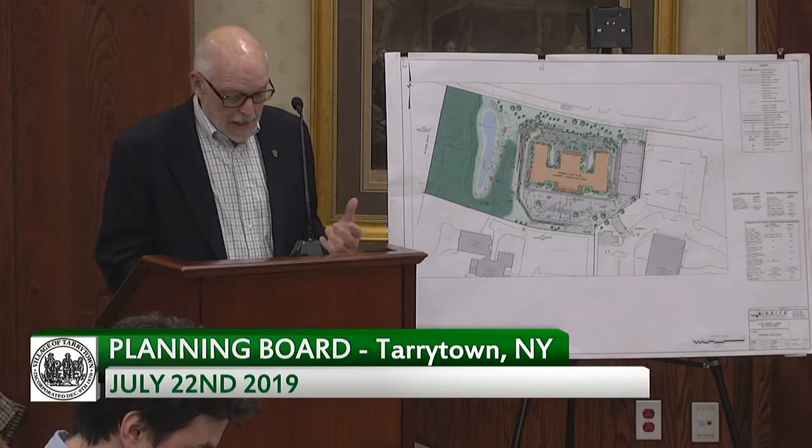Relative to environmental impact, we believe that through compliance with current building, energy, and stormwater regulations, we would have no adverse impact. Relative to zoning, we are asking that you make a positive recommendation back to the trustees because we believe our text appropriately protects the village, particularly providing a buffer between commercial kinds of uses and residential uses, making no significant impact on village services.

And providing the planning board in the text maximum flexibility in site plan review to make sure that there is no impact and that there is, in fact, maximum practicable effort made to include sustainability measures. Therefore, we are very much hoping, after you hear comments tonight, that you would close the hearing and move forward with this, including a recommendation to the trustees.

We, after all, need at some point to move forward in order to know if the village will allow this use at all, because it is not currently a permitted use in the village. So we're hoping this moves forward. Thank you very much.

Does anyone else in the audience wish to speak on this application? Okay, Bob, you want to come up? Tell us your name and your address, please.

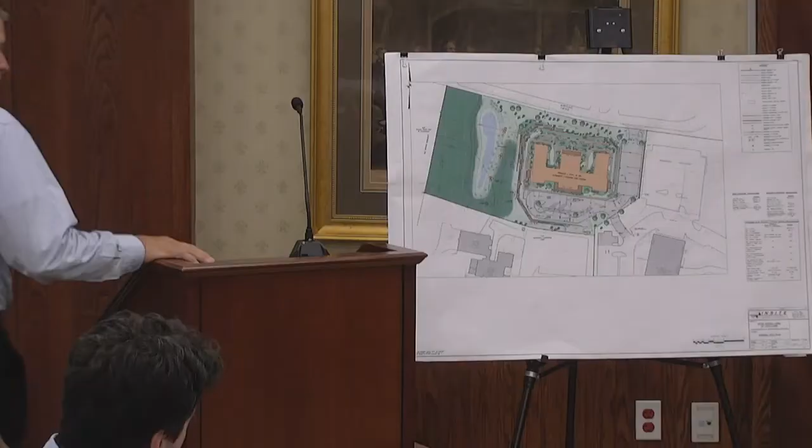Yeah, my name is Alan Green. I live at 8 Bridge Street here in Tarrytown. I grew up in Westchester, born and bred here. Raised my 3 kids in Edgemont. Love Westchester. I've been a commercial lending officer for my whole career, over 40 years. Made commercial loans in this area to probably 100 companies.

Saw it develop. Westchester I'm very proud of, and to see what has happened to it, from a dirt road I used to see on Central Avenue to great thriving businesses. I'm familiar with Transfiguration. I have friends who sent their kids to school there and I'm familiar with the area, and I feel that the site would be a good site.

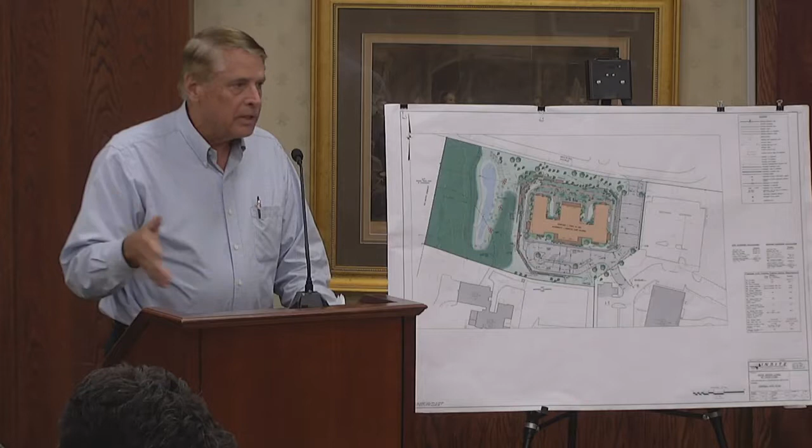I have no ties to anybody here except that I do know the sellers on a familiar basis, and I know they contribute to the community. I was on the board of directors and currently am on the executive board of directors for 20 years with the Boy Scouts, the Westchester Putnam Council here in Westchester. We've done a lot of good things. We have 8,000 scouts that we take care of and help.

And I feel that I have some personal experience with dementia and Alzheimer's. My father had it, and my first cousin had it, and there was no place to take them that really suited them, so I had to send them out of state, which was rough for me.

I feel that I've read something about Artis. They've done very good jobs. I worked in New Jersey. Part of my job was in New York, covering healthcare, and Alzheimer's specialties and dementia specialties are really a needed thing in this country, and we have to be more conscious of the spread of it because there's an awful lot of patients, people in need.

I was in the Navy for 3 years, served as an officer on a destroyer, and my honest opinion is that this site is a good site for it, and Tarrytown would be proud of it. Thank you. Thank you.

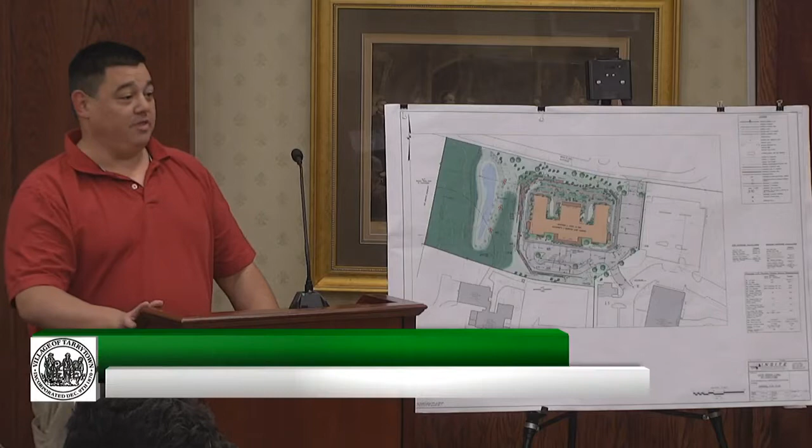Good evening. My name's Kai Yamamoto, longtime watcher of the planning board, first-time speaker, I believe. My wife, Kimberly, and I live at 20 Browning Lane with our 2 young sons. I've been a Tarrytowner for my entire life, which is, I think, a long time. And I thank you for the opportunity to speak this evening.

I was inspired to speak here this evening because I was watching the planning board meeting and I saw Ms. Raziulis mention that maybe people in the community might want to come speak, so I took that as an open invitation.

This also led me to read into and look at the SDEIS papers submitted. Over the past month, my wife and I, who are both registered nurses, have been walking around Tarrytown on daily morning walks, and we happened to walk past the site where this is planned. That inspired some conversation because I mentioned, oh, this is what they're going to do, since we saw the sign out that said the planning board is meeting about this.

We're happy and encourage a great amount of open space, and we like what the planning board has done with open space in Tarrytown. But we're also realists. We believe that development does have to happen, and it will happen here in Tarrytown.

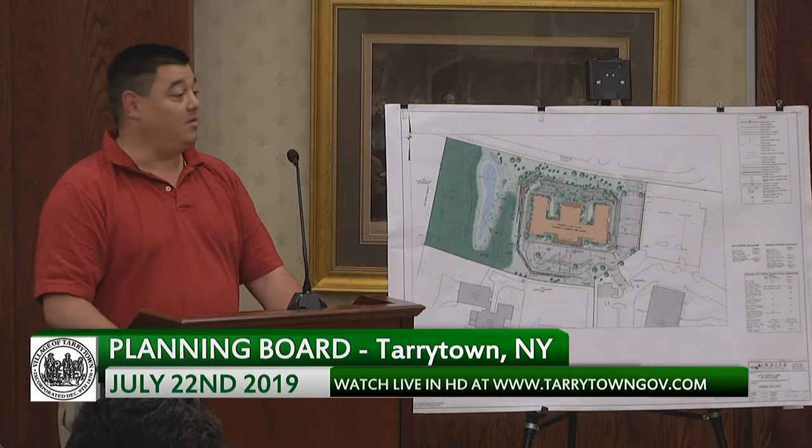Oh, really? I think you all know who I am. I'm the owner of the property right now.

We've owned this property close to 15 years, and we've worked closely with the town. Dan and I have had many meetings. We've spoken and tried to work with the Board of Trustees and with the village attorney.

We were fortunate enough to, originally we were going to build a 60,000-foot building on this property, which was the original plan, a 3-story office building. At that time, we had a medical group that were going to take a third of the building.

And then we were fortunate enough to meet Artis, and they came with a plan that I thought was more acceptable to the town because, A, the size of the building was 36,000 feet, smaller. I think one of the problems that Mr. Tedesco had said to me back then was he was concerned about the height. When he drove down Martling Avenue, you'd see a high building. Now this is a 2-story building instead of a 3-story building.

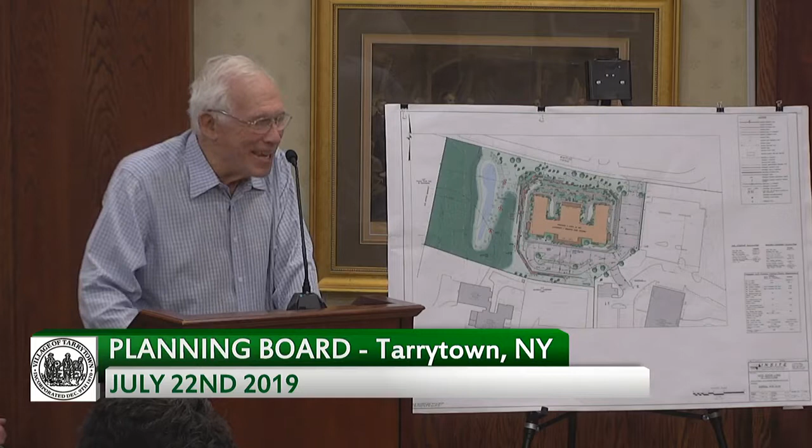So I know you've been working hard to get this thing passed. I appreciate all your work and that time and effort. And I just came here to thank you for your time and effort, and hopefully we can get this thing finished up before the end of the year. Thank you. Thank you.

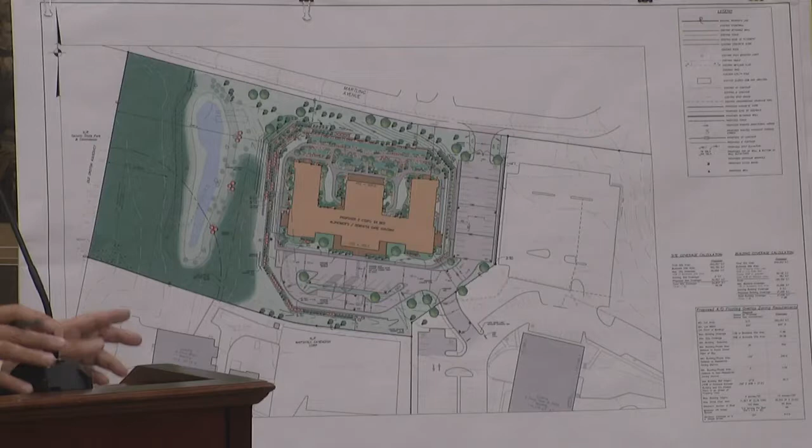The area to the left, going toward the aqueduct, where's the property line? Is that actually a live water body filled with water continuously? No, it is not. This is the detention pond that was built in 2015. There is no continuous water body, meaning no flowing brook that goes down through this property.

All of the catchment areas on this property are delineated in the stormwater management report. When this was built in 2015, it was sized to take not only the runoff from this impervious parking lot, but also to fully incorporate the runoff from this area.

To answer your question about the property line: the property line of this parcel, which is 4.6 acres, is this dark black line I'm tracing with my fingers, about 600 feet of frontage on Martling Avenue, 430 feet down in this direction. It's contiguous with the Marshall Cavendish Publishing property along this line, and adjoins the remaining 8 acres, a different parcel owned by Mr. Silverman, that incorporates this impervious parking lot.

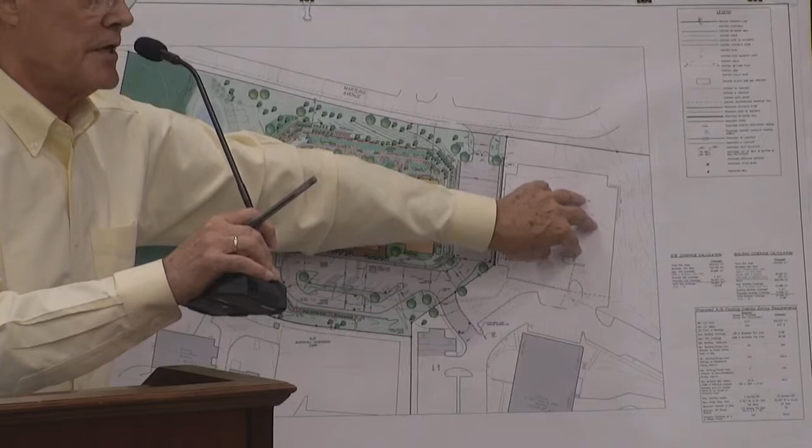So my question is, are you going to use the green space to the south, to the west of the building, for parkland or for gardens? I'm not. It will be open space forever. The short answer is, in terms of recreation for the residents, no.

That will be restricted. The residents are under what's called routine protective oversight, meaning they cannot be permitted to wander off on a garden path. I have familiarity with my own family with that issue.

So the gardens are extraordinarily well designed and landscaped. They're an actual model for the industry, because when people are looking for a place to take mom or dad, they're looking for a place they want them to be happy. This landscaping I'm pointing out here will be extraordinarily well done.

Thanks to Kathleen Snyder, who's here, raise your hand please. This area here is the area for the residents. It can only be reached through the building itself, and it's a beautifully landscaped area for all residents to walk these paths, often hand in hand with a caregiver, one-on-one.

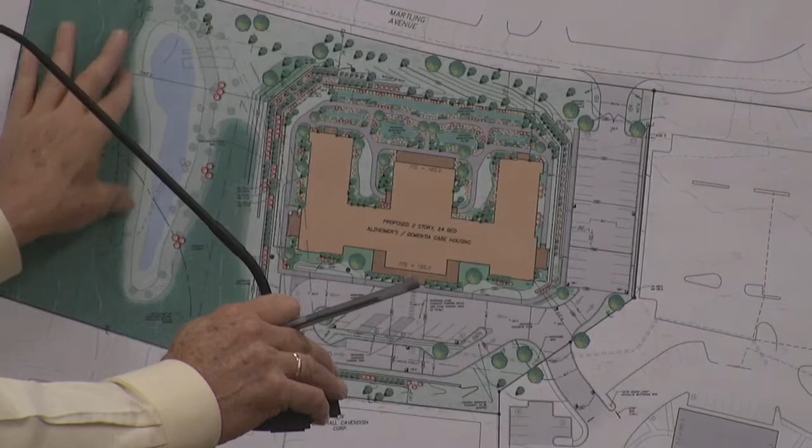These areas here, the retaining walls, would be extraordinarily well landscaped, but this area, Dr. Friedlander, is quite steep. This will not be used for recreation. This will be permanent open space forever, attractively landscaped, but its primary function is for that detention pond.

Okay, I look forward to discussing the size of those gardens and whether it's adequate in the site plan review, but you can tell me then, not now. Any questions I can answer? Any other questions for the board?

Okay, let's continue this. I'm going to move that we close the public hearing tonight on the draft SEIS, and ask the applicant to prepare the final SEIS, which will address all substantive comments made during the public hearings and written comments made during the 10-day comment period following this meeting. The final SEIS should also address all comments made by staff and council during production of the draft SEIS, and should incorporate the draft SEIS by reference.

Is there a second? Second. All those in favor? Aye. Carries unanimously.

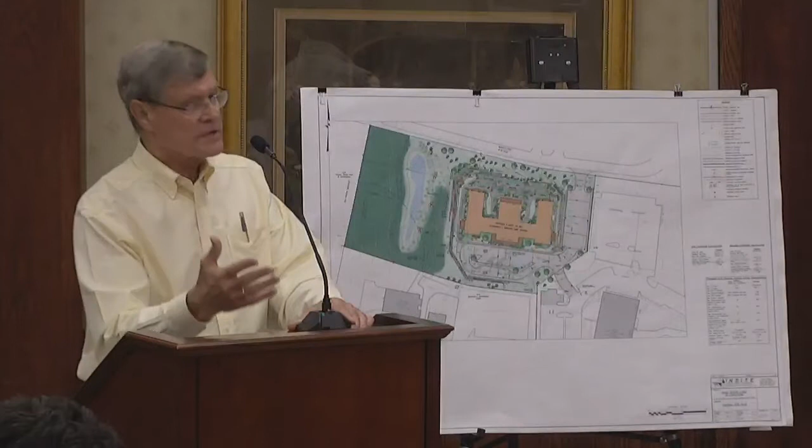Point of clarity: the public, even if they weren't here tonight, can still submit written comments to Liz Meszaros. That applies not just to people watching, but anybody in the audience who, on their ride home, says, oh my God, that's the question I should have asked. You've got 10 days, so send us the comments. Thank you very much.

Okay, we're moving to new public hearings. The first one is Michael and Angela Coffey.

I'll read the public hearing notice. Please take notice that the Planning Board of the Village of Tarrytown will hold a public hearing on Monday, July 22nd, 2019, at 7 p.m. at the Municipal Building, 1 Depot Plaza, Tarrytown, New York, to hear and consider an application by Michael and Angela Coffey, 100 MacArthur Lane, Tarrytown, New York, for site plan approval for additions and alterations to a single-family home. The property is located at 100 MacArthur Lane, Tarrytown, New York, shown on the tax maps as sheet 1.70, block 29, lot 16, in the R 7.5 zone.

The documents are available for inspection in the Planning and Zoning Office. All interested parties are invited to attend and be heard. Access to the meeting room is available to the elderly and the handicapped. Signing is available for the hearing impaired; a request must be made to the village clerk at least one week in advance. Additional approval is required by the Architectural Review Board. By order of the Planning Board, Elizabeth Meszaros, Secretary to the Planning Board, dated July 12, 2019.

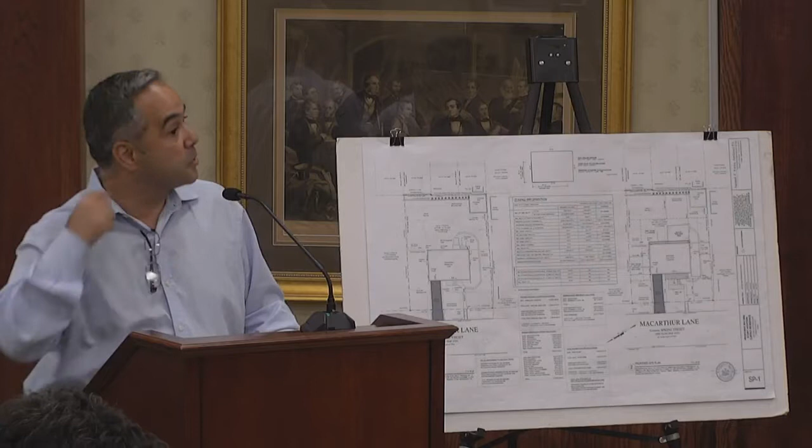This differs from my letter, from the time I wrote it to when the original denial letter was issued. There was a design with a more traditional roof that encroached upon the light plane. After review and discussing this with the applicants, they asked me to modify the roof plane slightly so that we were out of that light plane. Therefore, we will not need to go to the zoning board for any variances on this project, but we will continue to need ARB approval as previously stated.

Anyone wish to comment from the audience on this application? Anyone on the board? Anyone on the staff? Okay.

I'm going to first move that we declare this a Type 2 action. Is there a second? Second. All those in favor? Aye. Paul, you're up — we move to close the public hearing. Is there a second? Second. All those in favor? Aye.

This is on the application of Michael and Angela Coffey. Only a portion of the resolution will be read, but a copy of the general and specific site plan conditions will be provided to the applicant, and the entire site plan approval resolution will be recorded in the minutes of this meeting. Application of Michael and Angela Coffey, property at 100 MacArthur Lane, sheet 1.70, block 29, lot 16, zoned R 7.5. Resolution of the site plan approval.

Background: 1, the applicant requested site plan approval for construction of additions on a single-family residence located at 100 MacArthur Lane in the R 7.5 zoning district. These additions included a second-story addition plus a covered front porch and open rear deck. 2, the Planning Board on July 22nd, 2019 determined this to be a Type 2 action under New York State DEC 617.5(c)(11), construction or expansion of a single-family, two-family, or three-family residence on an approved lot, and therefore no further SEQR review is necessary.

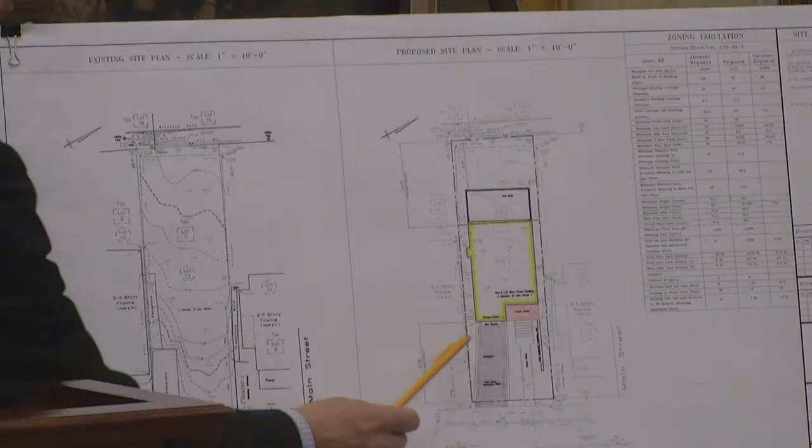I have the site plan here, which I've outlined. The yellow is the new single-family home we are proposing. The blue at the rear signifies the new deck. The front porch is in red, and I've got a new driveway hatched here. The garage would be underneath, with a parking spot in the driveway.

We feel that the single-family home we're proposing is going to be in keeping with the existing character of the neighborhood. It is a tight neighborhood with tight lots, and this lot is small and very undersized. Anything built here is going to require several variances, so we will have to go to the zoning board and the architectural board. We feel this house is not going to cause any adverse effect on the natural environment of the neighborhood.

We are providing parking for 2 cars, 1 in the garage and 1 in the driveway. There was once a house on this lot, which has been demolished. The existing survey here shows the vacant lot as it is today.

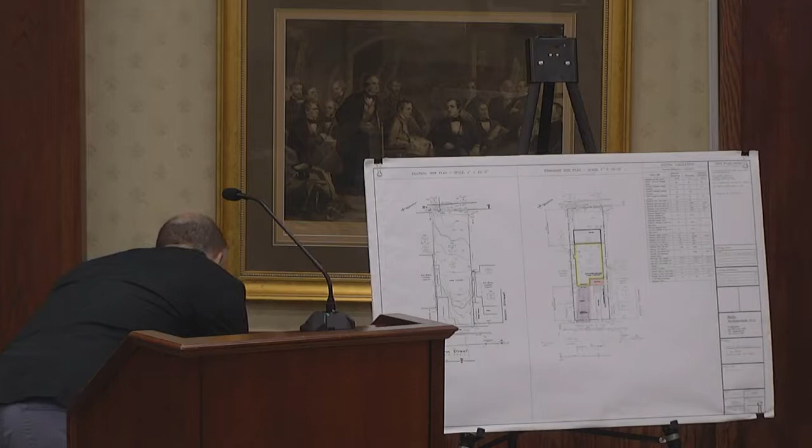By the way, the actual zoning requirement for the lot is 20,000 square feet. How much? 20,000. It's close, eh?

So this is the streetscape here. This is the house that we're proposing, the house to the left, and the house to the right. And I have photographs as well.

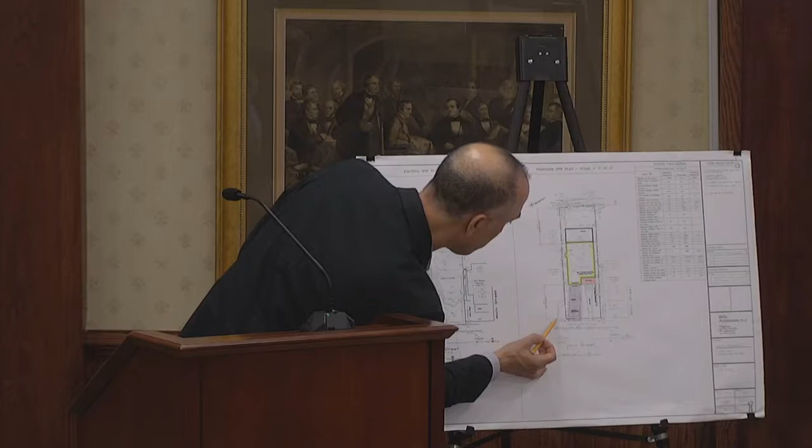And what's the setback on each house on the left and right, and the rest of the street? And what's the setback on this proposed house? The setback for our house is 30 feet, so we're trying to maintain the front yard setback. If you look at the site plan, the house to the right is about 15 feet off the property line, and this one might be around 10 feet.

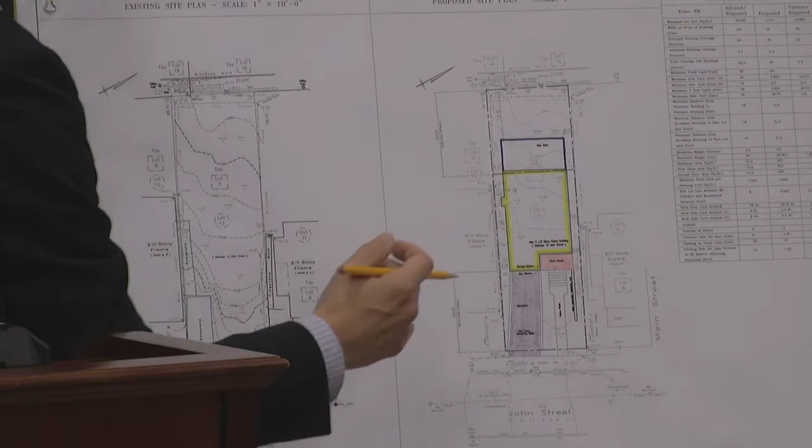Is there a reason why you wouldn't want to be in more conformity with the neighbors on that? Well, one of the reasons is because we wanted to have a garage. And in order for us to get down to the garage, we need a certain amount of slope. So that's why, and also I wanted to get parking for 2 cars.

So if we have parking for 2 cars, I don't need that variance because we're required 2-car parking. Right.

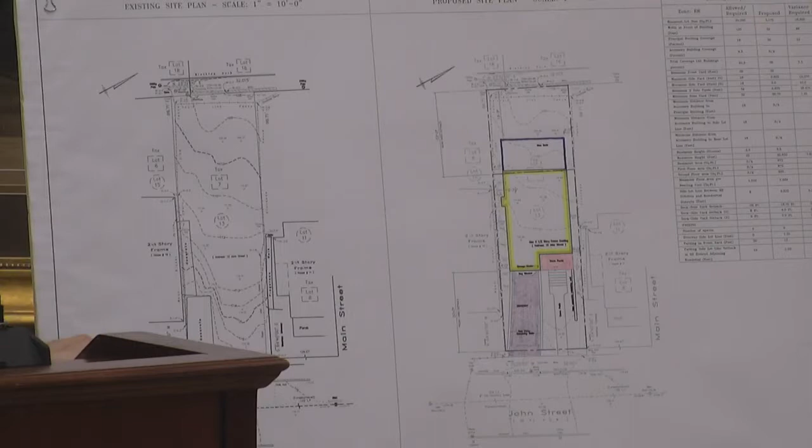I'm certainly not opposed to the house being there, it's just, this is basically 3 lots off of Main Street, and there's certainly an historic character, or at least a certain conformity there, which I don't know if this would be in the best interest of that or not.

It seems like... I also know that this particular neighborhood is very tight. Parking is also an issue, so we were trying to alleviate that by providing as much parking as we possibly could on the site.

So this would eliminate having parking for this house on the street, parking for the neighbors. I guess the question is, does that outweigh the aesthetic look of the street by pulling that house back when everybody else is basically 10 feet from the curb? I'm just putting it out there to you as an architect.

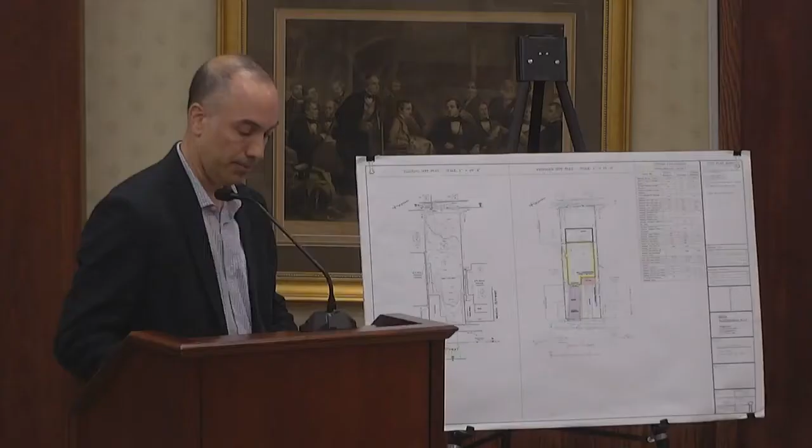Now it is an existing non-conforming lot, right? There was once a house on here. So, I mean, I could argue that we're not subdividing, we're not reapportioning. So it is an existing non-conforming lot. I understand, I've just noticed that, that's all.

Well, yeah, we need several variances here. One thing that would be very helpful is a streetscape showing all the houses, so we could see what your proposal really looks like compared to that street.

When you say all, you mean like maybe 2 or 3 other houses on either side? Yeah, on either side. If you were standing in the middle of John Street, near the corner of John and Main, and looking down the street at a slight angle, you'd see, if you've been on John Street, you've seen it.

You know their houses are all pretty much in a row, and it'll be interesting to see what this house would look like, and the fact that it's set back, it would be an anomaly, that's all I'm saying. And again, I'm not saying it's wrong - this is what we're here to take a look at and see what would be the best thing for everybody.

You may also, if you're going to ZBA, find it helpful to provide the size of all the lots. I think visually they seem very similar to, maybe a little bit bigger than yours, but it'd be interesting to know this one is 5,000, this is 4,000, this is 3,000, whatever, so that gives you an idea.

For ZBA? Yeah, just saying a copy of the tax map, for the planning board as well. Just a copy of the tax map of the street would certainly be sufficient.

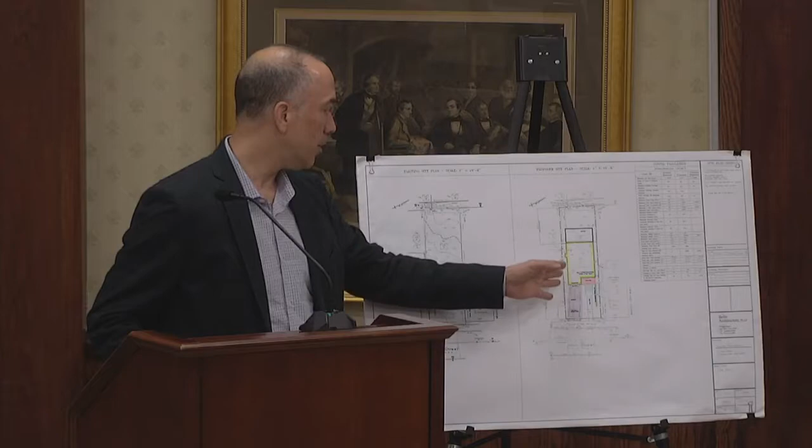I can tell you that the house we're proposing has got more space between the adjacent properties than the old house. That's good to know. But it goes farther back on the lot, I guess. It does go farther back, yes.

And the height is similar to the other homes on the street? If you take a look at the streetscape, it is pretty similar. In the back, as the property slopes towards the back, it's gonna be higher, but at the front you can see it's pretty similar in height to the adjacent houses.

Do the houses adjacent to it have similar side yard variances in existence now? That is to say, you have 3 feet and 2.5 feet side here, 2.6 for one side and 3 feet for the other. So the house to the left is 1 foot away from the property line. 1 foot? And the house to the right is 3.5 feet away from the property line. So similar - there are virtually no side yards.

There's almost no side yard. These are tight lots here. Well, tight is an understatement. Yeah, for all of them. All of the houses are tight, yeah. This is very helpful.

Should also note that the rear of the property is the South Washington parking lot, so there's no other homes in back of it, just surface parking. For all the houses over there? Not all of them, but it goes 2 or 3 houses in, and then you have the parking lot.

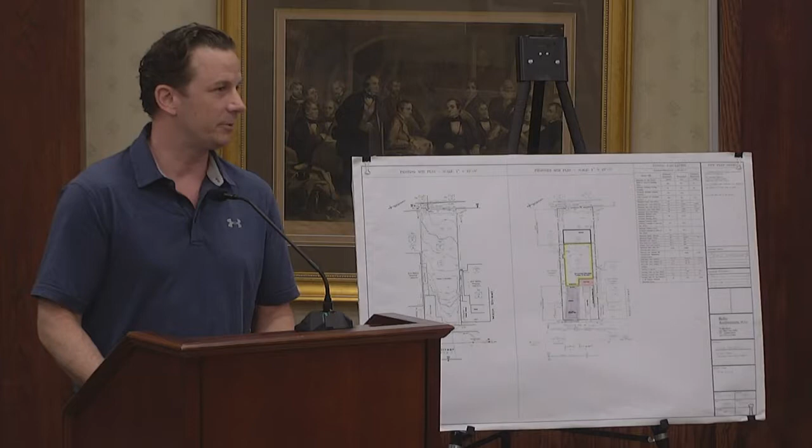First off, we're pretty happy if anything happens to that lot, besides the big mess that it is and has been for years. But, in looking at the plans briefly, in full disclosure, our architect is Sam Vieira, who's just here, and my wife works for him.

So we went over it with him really briefly because he was away on vacation. But we had some questions and concerns regarding the plans, and I'll lay these out and you guys can help me through them. Mr. Berge, if I'm saying that right? I think you reiterated one of the main things we have, which is the integrity and historic aspect of the neighborhood.

That's part of the reason we've spent a lot of time trying to restore what our current house is and what it was. Most people in this room probably know better than me, who's lived there for 10 years, what that lot for 13 John was before. So it means a lot to us.

In regards to looking at the plans, it's difficult because I was looking at them from pictures that my wife took on a cell phone. Walking up the street, it seems like there's 3 retaining walls now in the front of 13 John in the proposed lot, and I was trying to understand what those are.

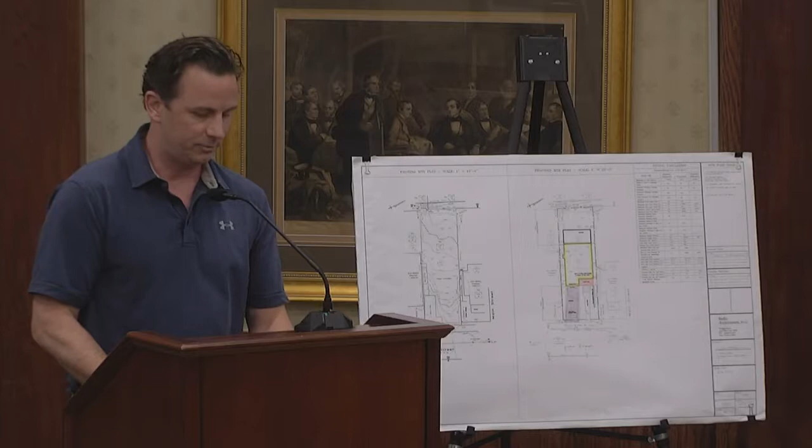I think it's because the driveway slopes down pretty much, and then the walkway goes either straight or up to steps that go up about 7 to 10 feet or so. So the front door seems to be starting where our second floor starts, is how I see it. I could be off on there, so keep me honest, but that's one thing that stood out to me.

I'm trying to see, because you already said some of the things that concerned us, which is great. The setback overall, I was trying to figure that out, because it is set back pretty far. To put it in relative terms, our kitchen is in the back of the house - I think the front door starts at our kitchen. So the majority of the house is stretching into the back with the deck, so aesthetically from the front it will be set back quite a bit, if I'm reading this right.

Even if you want to fit a car in front of a garage, I think most of this is because you're trying to get a garage in there, which I totally get. But it seems like you can move the house forward and still get a variance to do that. But I understand there's a lot of variances - we know, we live them, so I get that.

Let me see what else we had here. One of the things to help us see this, and I know there were already some requests here, and I don't even know if I'm allowed to make this request, but it would be great to cut the growth down and stake out the footprint of the house to actually see where it is. I'm trying to visualize that, and it's difficult to do. I think that would go a long way for us and probably help the review boards and the neighbors, just for the impact there.

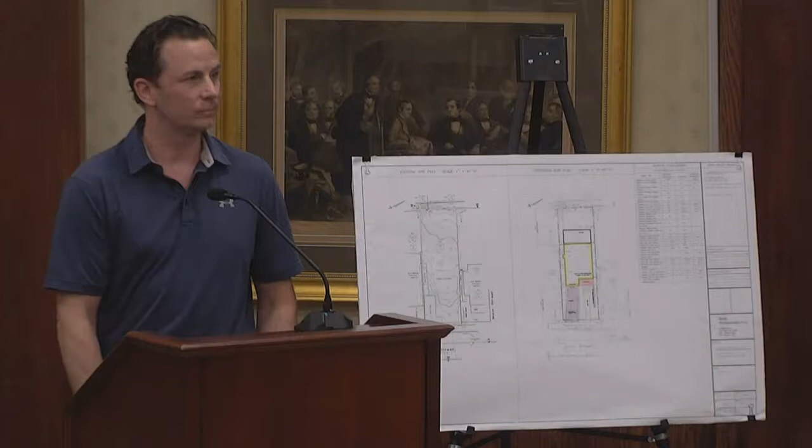Oh, got it, okay. What is the driveway distance from the street to the beginning of the house, to the garage? What's the driveway length? It's 30 feet, because we put the house at 30 feet.

So why did you pick 30 feet? Why'd you pick 30 feet for the parking on the driveway? 30 feet is so we wouldn't need a front yard variance. I was trying to reduce the number of variances. That was one of the reasons why we did that.

What is the front yard supposed to be? 30 feet. Oh. But since you're asking for a lot of variances, you might ask for that variance too.

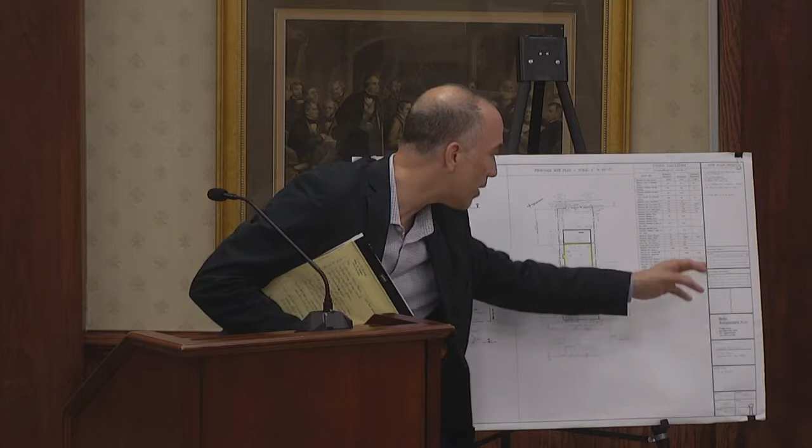We could take a look at that. If it addresses some of the concerns of the neighbors, and it doesn't affect your ability to have two parking spaces off-street, it's worth thinking about making the building a little closer to the street. We could, but it's going to increase what we're asking for as far as the front yard parking. We're providing 12, asking for 18, so we're going to increase that, and we're going to ask for a front yard variance now. So we're going to be asking for more. I mean, I know we're asking for a lot, so.

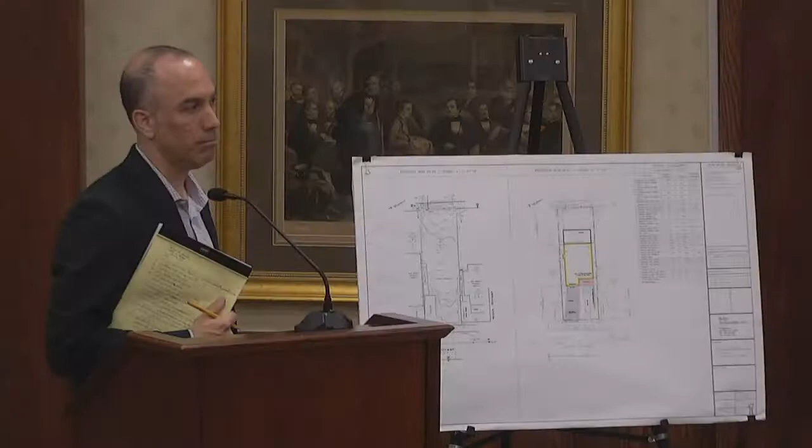You're also going to have an issue with the driveway slope. That parking is for a car underneath the garage, to get the two cars on that site. So the further forward you pull it to the street, the farther up I have to raise the house, because it's drive under. If you pull it forward to the street line, the driveway gets steeper, because the elevation of the street is fixed. Or the other option is to pull the house up, and now we get into issues with the number of stories.

The other thing I think would be helpful is to know how many homes on the street have driveways, how many have garages, and get a feel for that. I don't mean to be critical, but it seems that what's driving the design of the house is the need for a garage and a driveway, when the setting kind of says you're trying to put a square peg in a round hole, looking at it offhand. So the thought would be, I just don't know the wisdom of designing a house that's fighting with what's there on the street. That's just an initial thought of mine.

We really would like to get a garage, and what we're talking about is maybe having to get rid of it. But are there other houses on the street that have a garage? Yes. So would it be possible to do a different design, since the house that was there had a garage? None of the homes on that street with this size lot have a garage, none, there's no garages there. The only ones with some parking areas, I believe 23, a few houses down, proposed a parking area, and they've actually created curb cuts to try and get off-street parking. Right, so that's kind of a prime real estate to have off-street parking, so.

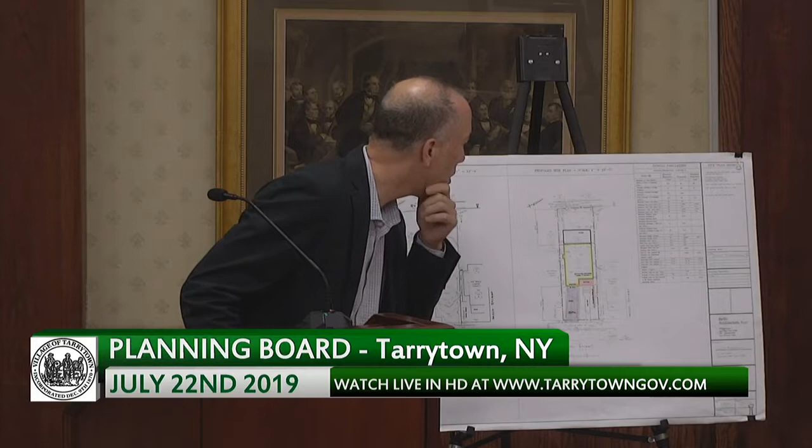No. But that would mean killing a space in the municipal parking lot, which I think would be a stretch. Yeah, that would be a stretch.

At least it was imaginative. Yes, thinking outside the box. Good try. Outside the box, way outside, on another planet, as they say.

Anybody else in the audience want to make a comment? Please come up, give us your name and where you live.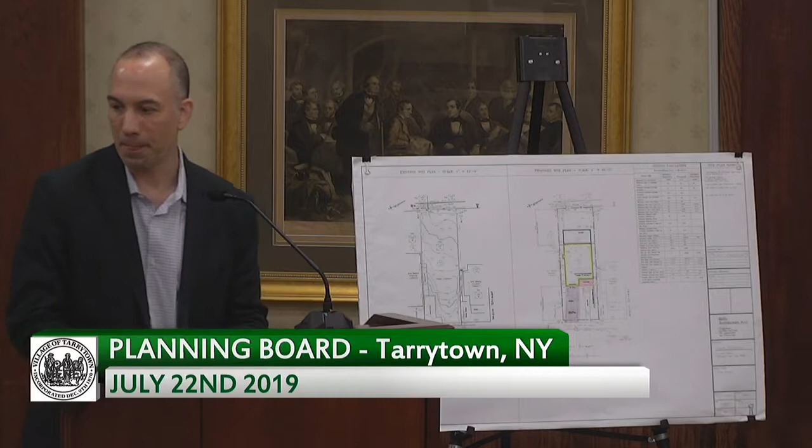Hi, my name is Romy Peck. This is my partner Jonathan Dzinski, and we live at 15 John Street, the house to the south. Can you speak a little louder? We live at 15 John Street, which is the house to the south.

We also had some questions and concerns. I think a lot of them have already been covered here, but starting with questions, there is a section right here that is sticking out. That is the part that will be closest to our house, and that's where the distance between our houses would be, I think 2 feet, 7.5 inches. So our question was, what is that?

Again, we were on vacation last week, so we got the pictures from Juliana, our neighbors, and Tim, so it was a little bit hard to see. But it sounds like there may also be a gas line close on our side of the house that we wanted to know what that was for and had concerns about that.

And then the last piece was, when we moved in, so to answer the question about when the house was taken down, that was in 2014, because that's when our first daughter was born and she was a baby. So that was very exciting to see the bulldozer and the guy with the cigar, and he was very good. But we were really excited to see the house come down. We always thought that something nice would be put up next door.

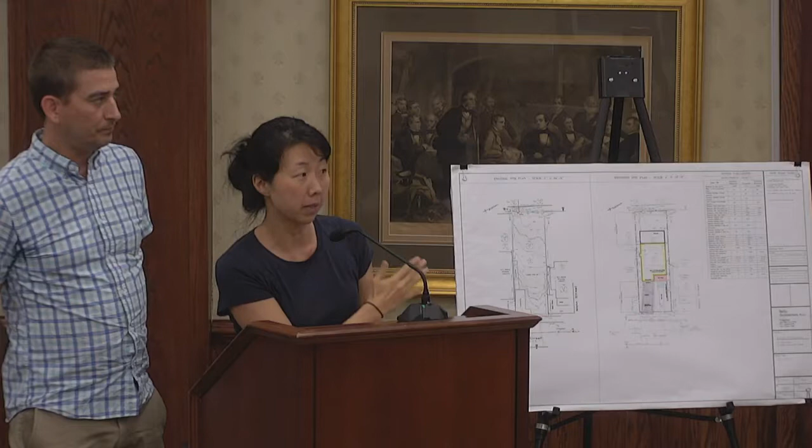We're concerned about fire safety, snow removal, ice, and maintenance, because with the existing fence, either side wouldn't be able to maintain that side of the house. We have a really hard time. I think it was mentioned there's about a foot between our house and the property line, which we can't do anything about. So we have a hard time maintaining that side of the house, and with the fence there, it's virtually impossible.

I'd just like to underscore our concern with the proximity, the setback. Our house to 17 John Street, our houses are about 4 feet apart. Our houses were built in 1890 something, so obviously a lot has changed since then, and we have current setbacks for reasons. I understand it's going to have to be close, but I think we could do better than what we had 130 years ago. That's my main concern.

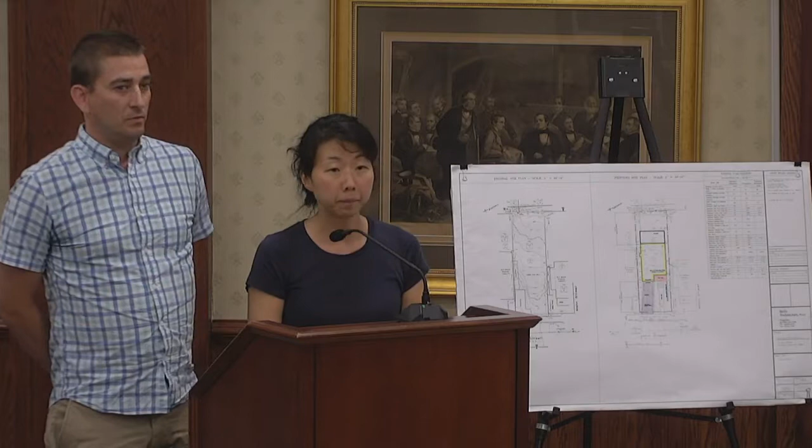I don't know why that chain link fence is there. Why is the chain link fence, it looks like there are two of them, right? The fence that was there is a temporary construction fence to keep people out while they were demolishing the house until something takes place. So that's not a permanent fence. Oh, great, okay, that makes sense. Are you going to have a fence?

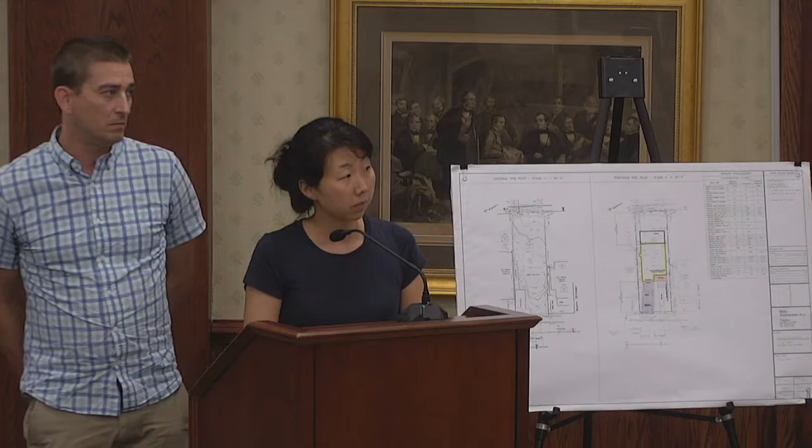We're not proposing a fence. It's part of the application. So there would be no fence between the two properties? That would be great, that would be ideal. Make it easier for everybody to work on, to take care of, to get into and repair something, for both houses.

We're also concerned, like if there was a fire in the back or somebody needed access to the back, how would they get it? Is the primary access going to be from the back door, on the deck to the backyard? Or will there also be pathways on the sides?

Now, the lot width is, again, what? 32. And the house is 30? The house is 25. So we have 3 and 2? We have 4 feet on one side and 3 feet on the other. And they have 2 feet on their side, so it's like 6 feet?

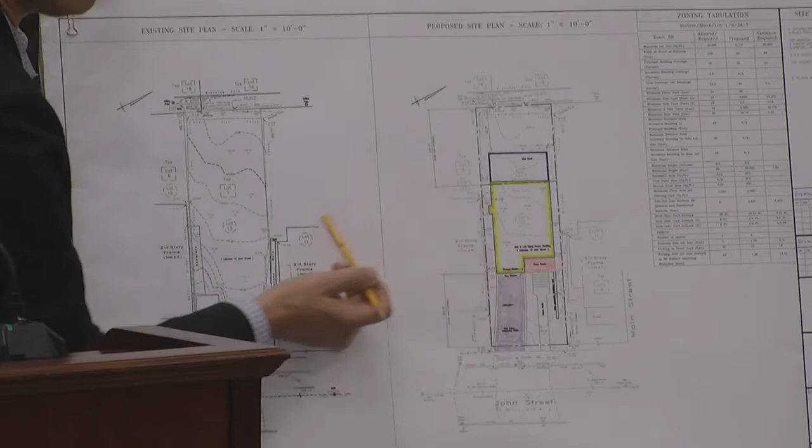They don't have two, they only have 1.5 here and 2 there. Over here, I think what they were referring to is this little bump out. That's a one-story bump out for the fireplace. The width of this is 4 feet. So from here to the property line, we have 2 foot 7.5, but the rest of the house we have 4 feet, which I believe before, the old house had about 3 feet, 3.06. So we're actually improving this side a little bit, except for this little bump out. On this side, we have 3 feet from the property line to the house, and I believe before there was 1.5 feet. So it's improved on both sides, except for that little bump right there.

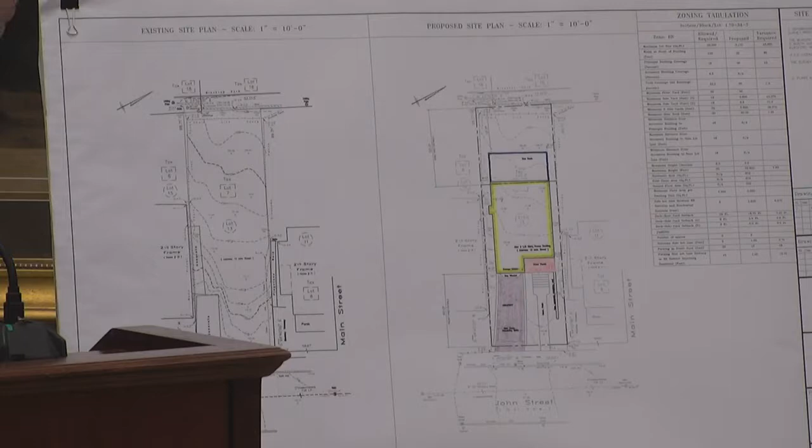Would it be possible to switch that over, or do you even need the bump? Dan, you want to say anything? Well, I'd have to take a look at the plan and see if we can maybe push that in a little bit. Now, when you refer to the fireplace, this is one of the direct vent fireplaces, it's dual tube, so you can't do it internally to the house, have the wall straight and build a mantle into the house inside? It's possible, it's just, like everything else on this site, the house itself is also tight.

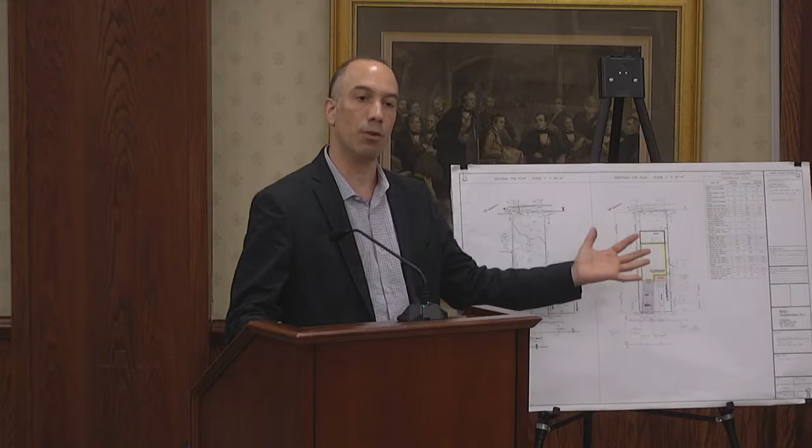Right, because if you go this route, you're actually violating some state codes, which requires a sprinkler system. We are sprinklering the whole house. Okay, the whole house is being sprinklered. But your enclosure around that fireplace is going to have to be non-combustible materials to satisfy the building codes, because you're less than 3 feet from the other property. Correct. Yeah, I think the whole side has to be non-combustible. You have a 5-foot rule with no openings on that side. Is that correct, no windows? No, we do have windows on that side.

We're going to have to evaluate that, but that's going to have to be code compliant as far as the setbacks from the property line. And you have more room on the other side though, facing the other house. We have more room on this side? Yeah.

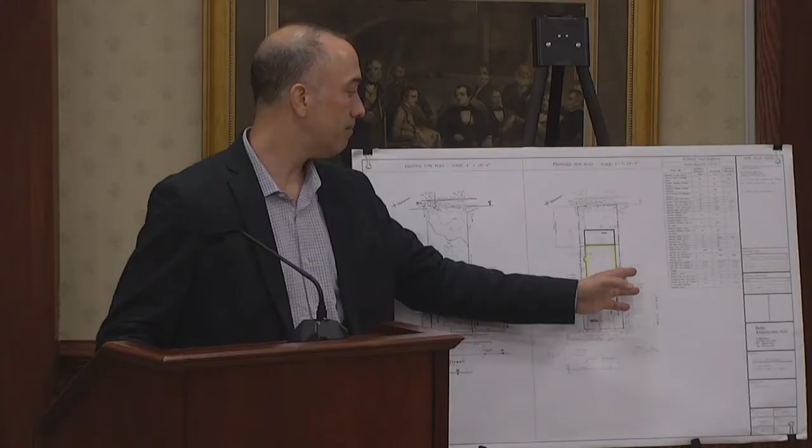Well, because it goes further back, their house on that side stops. You go back further than the other house, I think. You're saying we could push this house that way? Or move the fireplace or whatever. Okay, I could take a look at that.

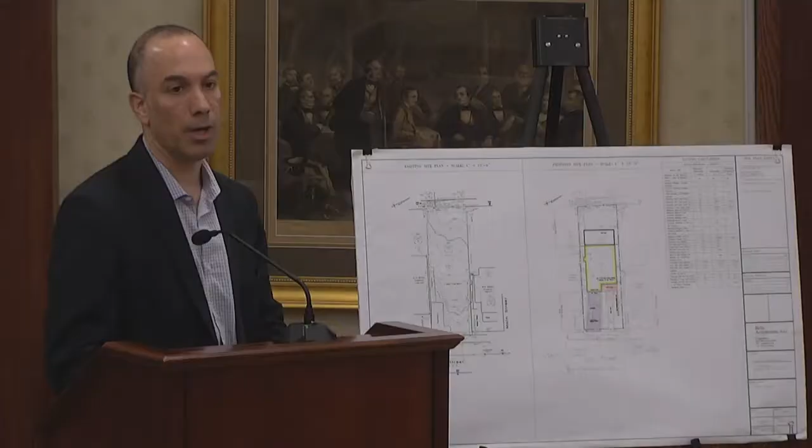Okay, you want to have a motion? I just have a question. Dan, as far as you know, John Street has no landmarks, but this is 2 lots off of Main Street, and it's as close as you can get to the Main Street Historic District. I think most of the houses on John Street are probably late 1800s, maybe some early 1900s. I'm concerned about John Street, I think it's one of the more unique streets in the village. I know you have a tough thing here, but I'm concerned about something being inserted that seems drastically different from the other homes on the street, and again, this house is basically forever, so I'm concerned about that.

Just to follow on Paul's comment, because it struck me as well, we are doing a lot of work trying to preserve the historic nature of the village. Planning Board is working with the Historic Committee, and you're going to go before the Architectural Review Board as part of the process. Correct, and they're going to have that in mind when they look at it. So take a look at all the houses on the block and make your architecture, it's a new house, but it's got to fit in with that. We're not asking you to build an 1880 home, but the architecture should reflect the historical ambiance of that area.

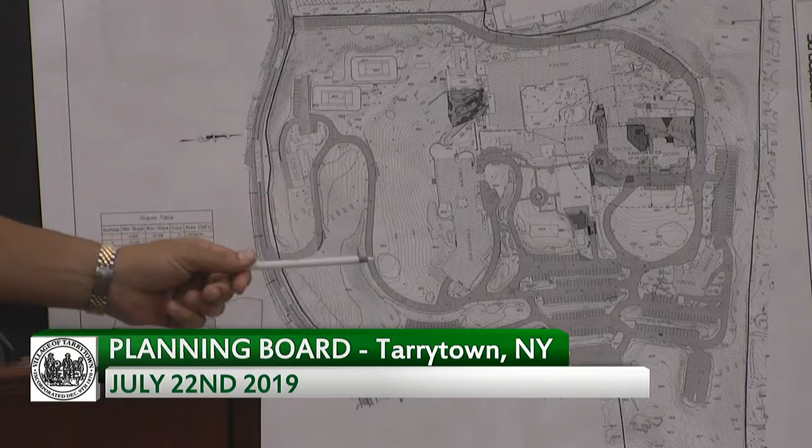Good evening, Paul Berthet with the firm Fusion Engineering, representing the applicant, Rubicon RA Terry LLC, 49 East Sunnyside Lane, Tarrytown. Thank you, Chair, for describing the improvements. These are all generated to provide additional ADA compliance within the facility, and I could take you through all of the areas that we're proposing. I believe we're here tonight because we are in the OB zone with a compatible use permit, so any changes to the site plan would require site plan approval. So just taking you through the site here, we're looking to provide handicap access at the King's Mansion, which is at the top of the hill, and provide a new or modified rose garden into a more contemporary flagstone garden.

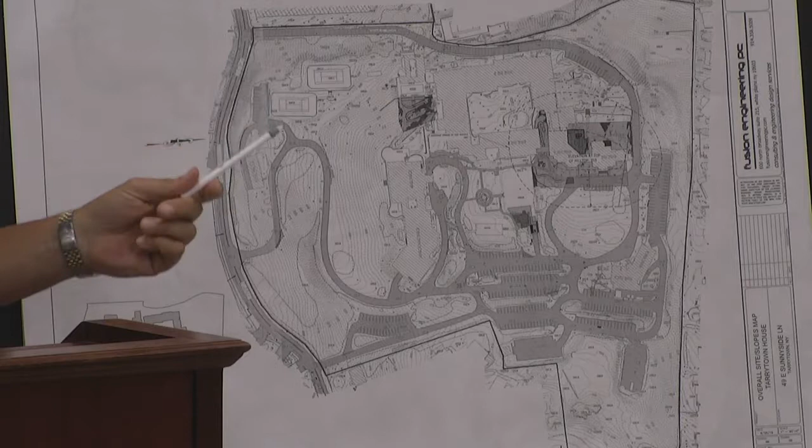We've designed stormwater to deal with the additional runoff from those surfaces for the patio. There's an additional change to the rear, one of the rear patios of the mansion, to also allow handicap access from the building to an outdoor patio area. That would be in the back corner, so it's just a matter of elevating the patio about 10 to 12 inches to eliminate a step coming outside.

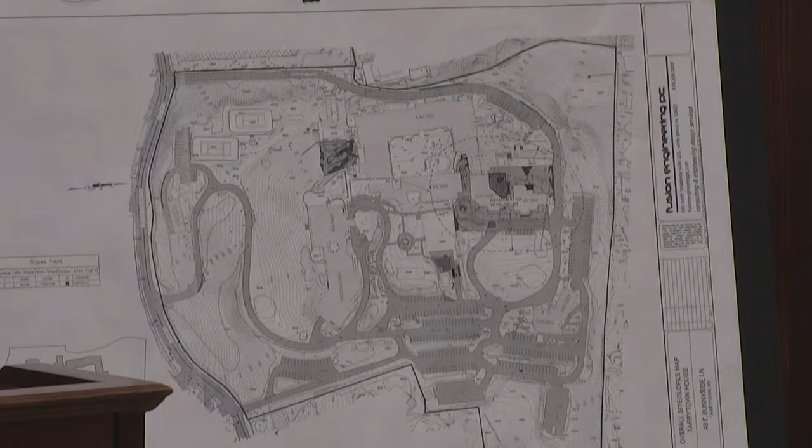This is from the King Building. There's two outdoor terraces. This is on the left side. Is this on the south side of the building? Yeah, that's actually the north side of the building. Oh, that's in the front of the building. Here's the building here, here's the drop-off. So here's the back, there's a little back lawn area, so it's just one of the patios in the back. Okay, it's hard to tell, all right, I see now.

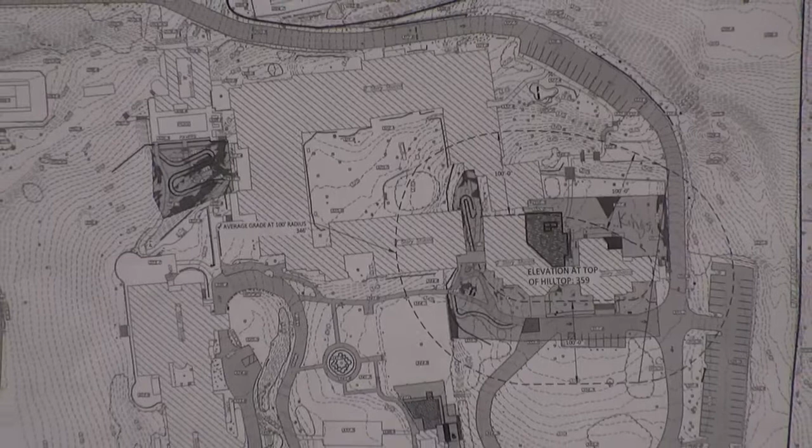We're providing handicap access between guest rooms as we're moving on, so just doing a switch back to make the grade compliant with 1 on 12, which is required for safe wheelchair access. Also, we're providing handicap access down to the pool area from the outside. So there's our existing paths now, so we're just modifying what's there to be able to meet the appropriate grade.

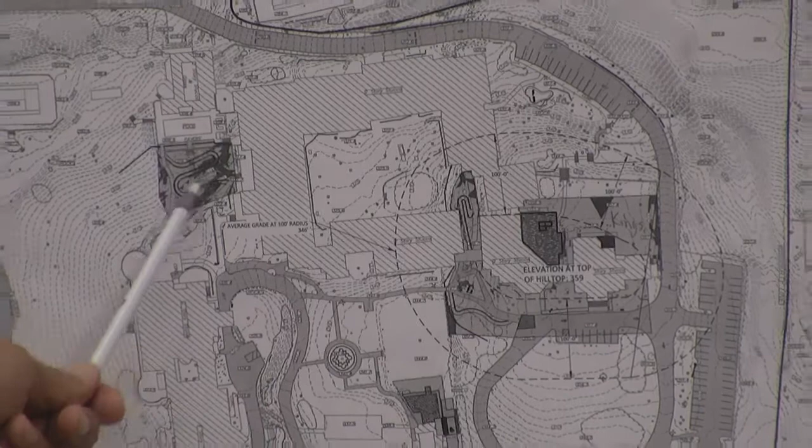How do they go from the King House to the pool, you're saying? So this is the King House. Right, then you're gonna walk around, the pool house is off to the left. So if King Mansion is at the top of the hill, there's a rose garden in front, and then all the way around to the south side of the residence building, guest suites building, is the outdoor pool. And then one of the last improvements is to provide access to the rose garden, so that there's a drop-off area for staging.

We're adding, as part of this renovation, 2 existing conference spaces being converted to guest suites. And there's an additional guest suite being proposed at one of the out-parcel buildings adjacent to the rose garden. So there's a total of 3 new suites, new guest rooms, going from a count of 214 to 217.

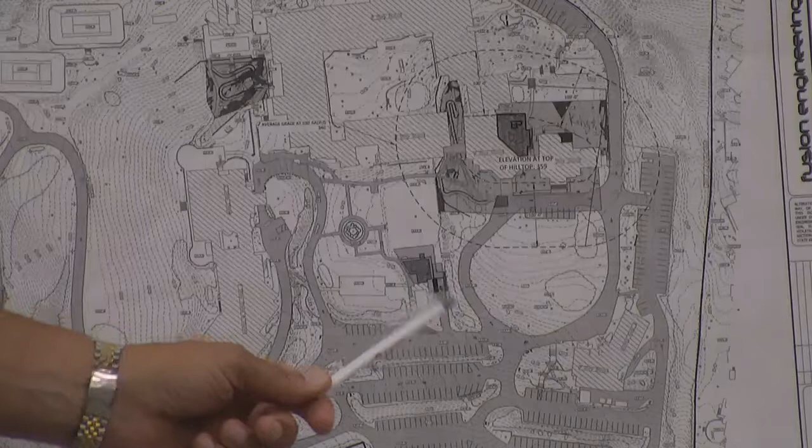We've provided you with an open space calculation to show that there's sufficient open space on the campus. It's a 26-acre site, approximately 23 acres is open space, so there's enough. Have you determined where you will put the 3 parking spaces needed for those 3 new rooms? We've got additional parking right outside of the rose garden, and no other parking improvements are proposed.

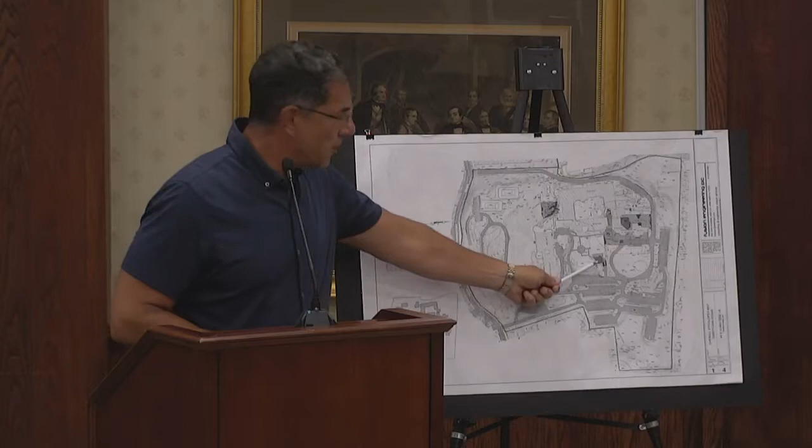Dan, you've received the stormwater and erosion control plans. Have you had any comments you'd like to make about that? Yes, actually, I'd just like to take one step back. You mentioned the additional 3 spaces, I don't believe we have that set of plans. That's a prior submission, did you revise to include that? For each additional room you're required to provide a space. Is this yours? Yeah, we're proposing 1 by the rose garden, and this set doesn't show the other 2 that we're proposing, so we'll resubmit. So there's going to be a revised set of plans to submit to us?

There will be, yes. I have seen the stormwater plans. Basically, the garden area they're proposing is a lot of gravel and all permeable areas, underground systems, so they're actually improving the site to better than what it is right now. I think we still have to wait for the parking plan, I don't know how you're going to address the stormwater for those spaces.

Suzanne, landscaping? Yes, also Ms. Nolan, I believe she gave you comments on the landscaping. I will take a look at those. There was a concern about the number of trees being removed between the pool and the lobby area. Okay, yeah, I don't think there's any major trees, there might be small landscape trees, but I'll take a look at our memo.

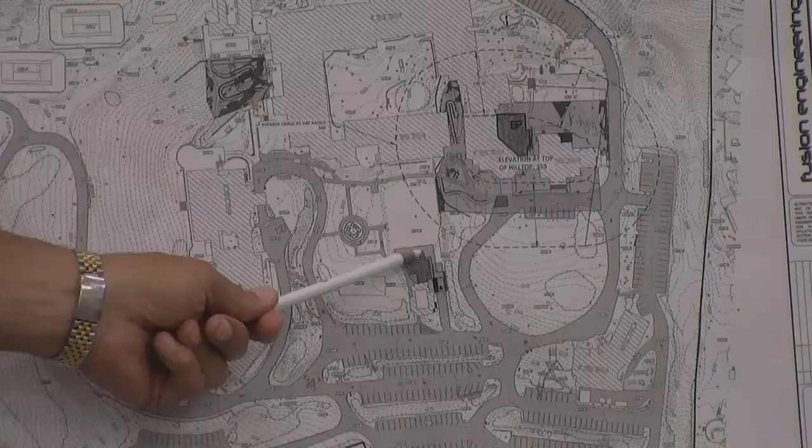Are you planning any additional landscaping? Yeah, there's landscaping around the garden area behind the King Mansion, improvements along the rose garden, and anywhere there's other disturbance there will be other landscape features. You should show on a landscaping plan any trees you're going to remove. Sure, and also the addition of landscaping you're going to provide. Yeah, this whole plan started with a landscape plan, so I'm sure maybe it just hasn't been reviewed yet.

On a totally aside issue, you may know the answer to this. Is 25 East Sunnyside part of your property? Is that an address there? I don't think so. The owner of the facility is in the room also. So just let you know. 25, what is 25 East Sunnyside? You don't know? Okay, does anyone know? No. I saw something in the newspaper saying 25 East Sunnyside Lane, and it said something about a restaurant there, and I can't understand.

I thought yeah, I saw that too. A new restaurant opening up in Tarrytown, it said, on 25 East Sunnyside Lane. I always thought it was part of the conference center, and they were opening up a restaurant in the building, changing the cellar, which is in the building, but it's not related to you at all. Well, we have a restaurant within the property, so it could be what you heard, but I don't know what the 25 Sunnyside Lane is.

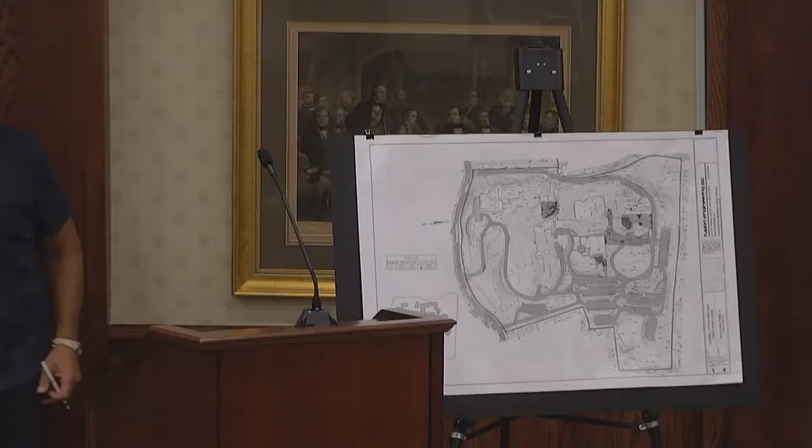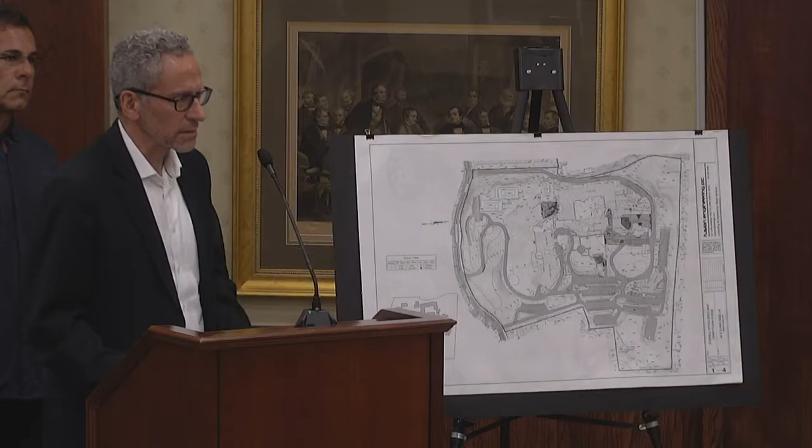You're not changing the cellar, the current restaurant? We're gonna stop using that as the primary restaurant. We're not gonna do any physical alterations to the space you're referring to as the cellar, but that's gonna no longer be the primary restaurant in the facility. But is a new restaurant coming in there? There's another space where there already was a kitchen, which is gonna be the primary restaurant. So it was already a meeting banquet area, already a public space. But I don't know anything about the address change, so that part's new.

Did they file a building permit? It could be the 25, I'm wondering if it's a little further up, just in Irvington, there used to be the deli at the corner. Is that possible? There was an empty space there. It's too close, it's as close as you can get to Broadway as possible. Unless it's on the other property where Mercy came in. Well, that's 828 South Broadway, so I've never heard that 25 Sunnyside unless it's 49. Could be, let's say it could be 49. And perhaps if you saw it in the press, it was just a mistake.

Okay, I'm going to move that we declare the proposed action a type 2 action. Is there a second? Second. All those in favor? I'm sorry, I may have missed it. Was this opened up to the public to see if there is anyone here to comment? Oh, yeah, does anyone wish to speak on this application? Thank you, okay, sorry. I will then move we declare the proposed action a type 2 action. Is there a second? Second. All those in favor? Aye. And then I move we continue the public hearing. Second. All those in favor? Aye. Okay, approved. Good, okay, thank you.

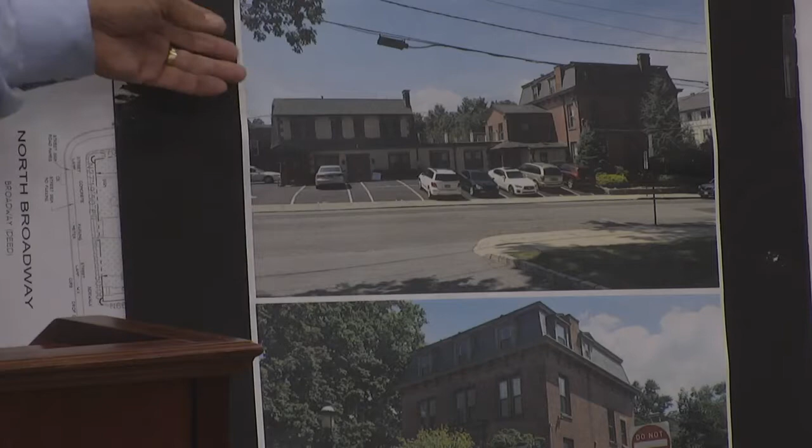Good evening, J.B. Hernandez, architect for the project, representing Lyons Pride, also Mr. David Lyons, one of the owners of the properties here. This property, 14 North Broadway, also encompasses 12 Hamilton and 18 Hamilton. The property right now has been empty for over 3 years. It used to have an aesthetic school and a dentist office, and in the rear there's currently a 2-family dwelling being used.

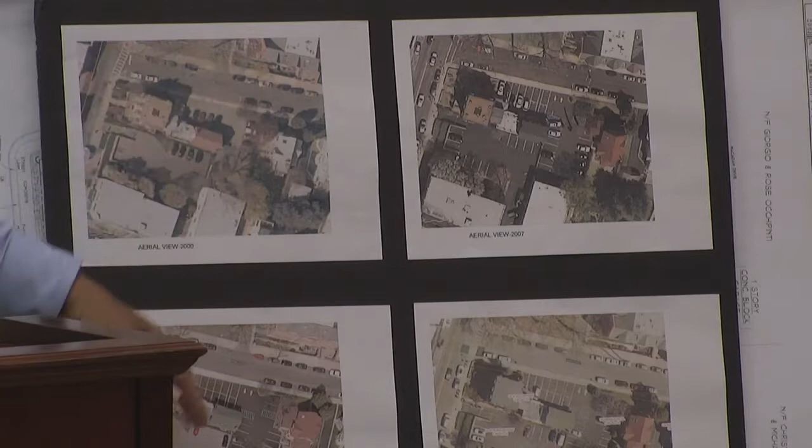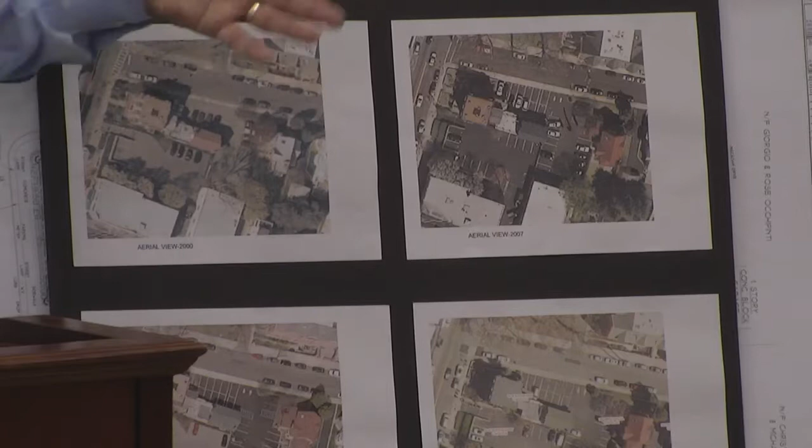The property itself and the parking area have not changed. These are 4 pictures from the year 2000 until today. Currently, the parking area has between 27 and 28 parking spaces, depending how the 2 properties are being used. What we're proposing is a change of occupancy for the property, taking the 2 front buildings on the lower level and upper level and converting those into 7 dwelling units, while maintaining retail space along Broadway.

We're not proposing any changes to the exterior of the building; all the changes are going to be interior. What we are proposing is restructuring or redesigning the parking area. Again, we're not increasing the parking, we're redesigning it to allow for better maneuvering, which will diminish the number of available parking spaces, bringing us down to 21. With the 7 units, the retail, and the 2-family dwelling, we require 25 spaces, so that puts us in a deficiency of 4.

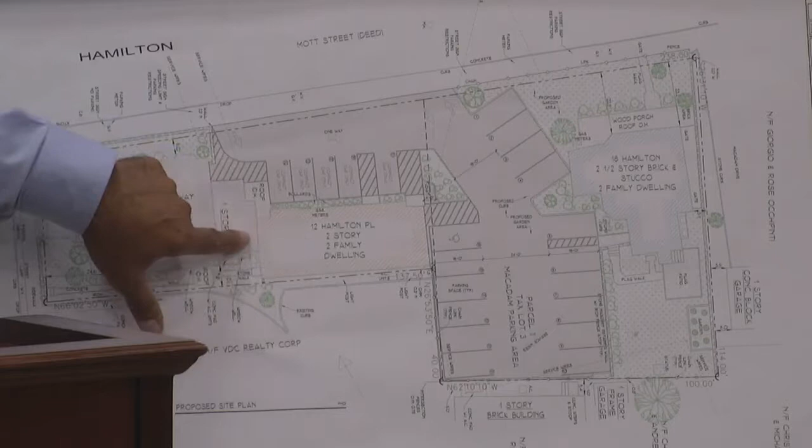Also, because this is a restricted retail, we're proposing to have residential at the lower level. That brings us to also need a variance, so we're going to be in front of the zoning board as well. Are the residential units rental units? Yes.

And the retail portion will be part of the first floor? Yes. Let me just clarify that. I'll interject, only because when we did the initial denial letter, that plan looks slightly different than our original review that was submitted on April 26th.

I actually indicated that it needed a use variance. When you read the zoning code, my interpretation, because it's in the RR zone, is that you can have a dwelling above a retail in the RR. So the issue becomes the dwelling above the retail, what percentage does that need to be? My view is that if it's greater than 50%, talking about the front building, because the back portion is all at grade, the front portion, in my opinion, needs to be at least 51% retail or reserved for such use.

As shown in the original plans, they had only 185 square feet of area. So I think offering the applicant the opportunity either to seek the use variance or an interpretation of the code as to what dwelling above a retail means, or revise the plans to better reflect that 51% share of the floor space.

That's the slight change we have made. We enlarged what is the office area and the retail area downstairs. I'm not sure we're still close to the 51%, but we will. Are these plans different than what you submitted to us? No, these are the plans we submitted for this application, not the April 26 plans.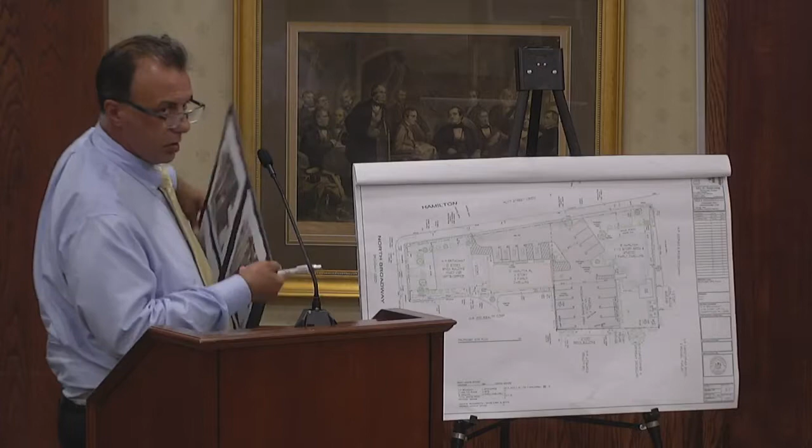Correct. Yeah, right now it's a long driveway, it's all open. Correct, it's probably all, what is that like, maybe 40 feet? Yeah, it's very large, very long.

You would also probably want to do granite or whatever the curb cut specifications of the board are to do that. And you want to specify the width of the driveway. You've got one way going in, so just put the dimension on there to help, and then you have an in and out at the other end, and give us a dimension on that too.

Okay, what are the size of the units that you're proposing? The units are about between 700 square feet to 800 square feet each. But what's the breakdown? Are they all the same, or is there 2 bedroom, 1 bedroom? There are 4 one-bedrooms and 3 two-bedrooms.

And how big are the 2 bedrooms again? I don't have the square footage per unit, but they're like 800. There's a 915 square foot one bedroom on the first floor. The two bedroom units on the second floor are 604 square feet and 628 square feet. And there's a 955 square foot 2-bedroom unit on the third floor. And then at 12 Hamilton Place, they're converting the 1-bedroom unit.

It's going to be a 1-bedroom unit of 620 square feet and a 2-bedroom unit of 1137 square feet. So how many units total? There's no residential currently on the property.

Can you talk about the necessity or reasoning behind 7 units on the property? Well, it was more looking at it as a rental unit. The property's been empty for 3 years. We did look at trying to do different things with the property.

In the layout of the units, we're trying to do minimal work on the building. We were trying to utilize what is there with the layout. It's a very nice interior, so we're trying to minimize the work. So there'd be no exterior changes to the building? No exterior change at all.

Dan, could you comment on the density question? I'm a little puzzled that you can put 7 units and there's absolutely no limit on that as it relates to parking. In other words, if you had the space, you could put 50 and it wouldn't matter?

You don't determine density in the RR zone. This is an RR zone, not your straightforward residential zone. It's a different zone, so there's no density limit that applies here. They're meeting the minimum requirements for room sizes according to the building codes. So that's really what's driving it.

But it's also related to parking, right? Each unit requires two spaces or something? Well, yeah, it always comes down to parking. So I think you're asking for a parking variance for 4 spaces for the units, yeah.

And what would be the difference in the tax structure on the property when it's completed? That I will have to get back to you. You can find that out, because one of the things I was concerned about was another property that had 5 units, and when it goes over a certain number it's considered commercial. Is it 3-family, Liz?

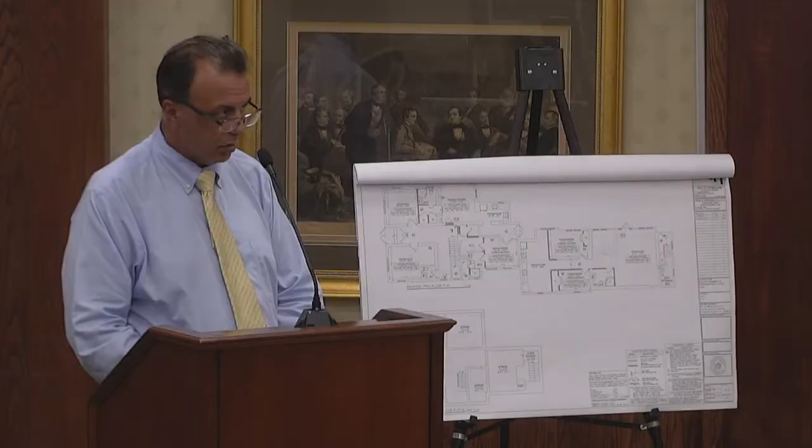Yes, 3-family, I think a different code applies, it would be considered an R2. Dan, there was a 5-family, and I was surprised the taxes on it were something like $16,000, and it sold for almost $2 million. I was just curious how that impacts things. It was on Wildey Street.

It's really probably the assessor that does that—if it's a rental, they determine it by income stream or whatever. But 3 or more units are multifamily under the code. Right, but I don't know how they're assessed, because I was interested in how that works. We're trying to look at the overall physical impact of when something's expanded, and how that affects the village.

Certainly the tax structure on that would be interesting to know, how that is going to change. Because you're making an impact on the village, and if the taxes don't really change, I think that might be something we need to discuss. You really have to talk to the town assessor and see how they determine it.

It could be different in different towns, but I believe rental is looked at by the income stream of it. That's something you need to talk to the assessor about and get back to the board on. Yeah, that would be an important part of this for me, just to see what the projected rents are.

Do you know what the projected rents are? No. Or does anyone know if they're proposing to build them? Well, I have the numbers, I just don't have them with me. Okay, produce them next time. That'd be great, appreciate that.

So when you say there's no formal density in the RR zone, it's based on the number of square feet you're covering above the building. If you're putting up a building with residents above it, the amount of square footage allowed for residential is a function of the size of the retail, the height, and the bulk. And there's no code saying a one bedroom has to be a certain size and a two bedroom another, so it's up for grabs.

And Dan, what's the code as far as the energy code for this? That's the latest code that would apply when it's taken apart and put back together? They're using the 2015 International Energy Code with the New York State Supplement. If you recall, our Local Law number 5 of 2012 adopted those regulations to be equivalent to today's code, so they would have to meet current energy code standards.

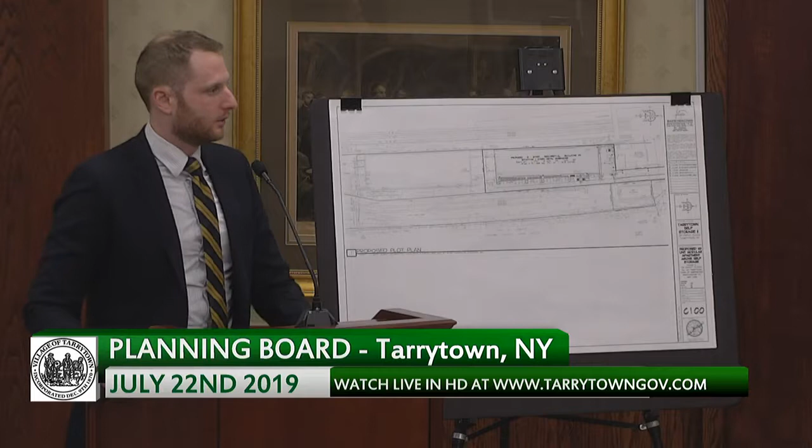As you noted, we are before the planning board with a referral on a petition for a zoning text amendment that was sent back to you by the Board of Trustees. So we're here tonight to touch base on the associated site plan, give you an overview of some of the supplemental materials you'll be expecting in the coming weeks, and to ask that the board declare its intent to act as lead agency under SEQRA and set a public hearing for next month.

The project itself - we've actually reduced the amount of self-storage use on the first floor, just a portion of it. You'll recall my client has a standing approval for pure self-storage, but we're now looking for transit-oriented mixed use on the site. So self-storage is a portion of the first floor, along with a retail component, an entrance lobby, and some residential facilities, above which are 69 residential units and approximately 73 full-time parking spaces associated with the site. That includes 32 spaces on site, as well as 41 spaces contracted for with the MTA, plus an additional 20 spaces on the MTA lot available on nights and weekends.

We've filed with the board a full set of plans as well as a full EAF. We understand we have to get you some supplemental studies. So what I'm going to ask now is for Dave Smith, our planner, to walk you through some of the additional materials we're going to be getting to the planning board.

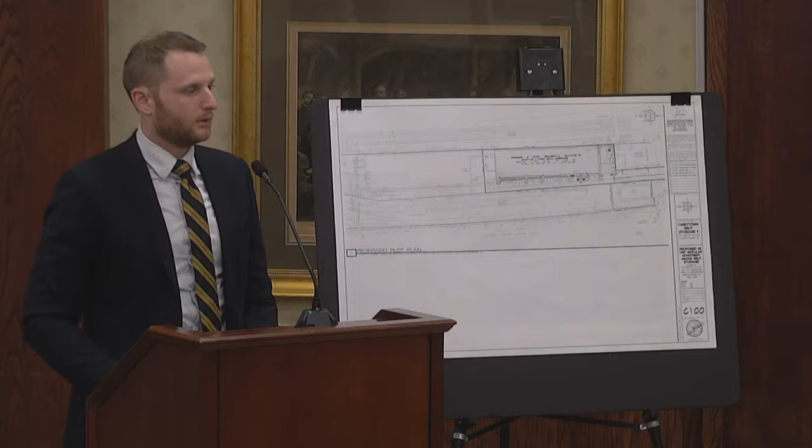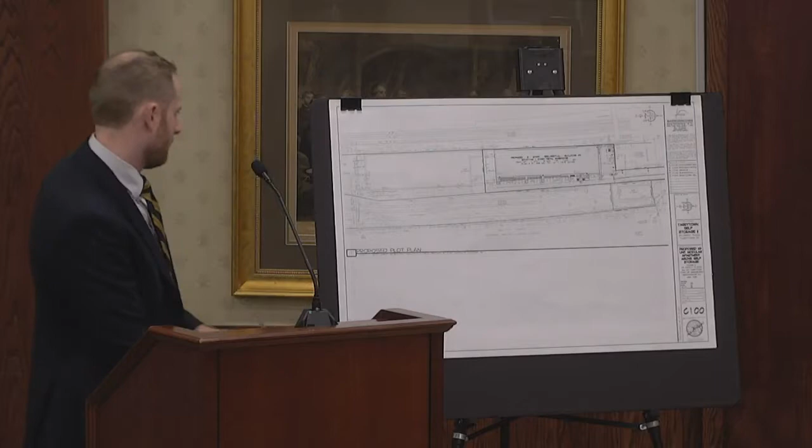Could you just tell me those numbers again for the parking? I went by them too quickly. So it's 32 spaces on the property. We're contracting for an additional 41 full-time spaces with the MTA, as well as 20 part-time spaces for nights and weekends. And what's the location of the spaces? I mean, the 32 I know are along the building, is that right?

Just to clarify, you're showing the on-site spaces, but not the off-site spaces. These are our spaces on site, and the contracted spaces will be right across the street on the MTA property. Across the road. And is it possible to get more than that across the road bed from the MTA? In other words, the ratio you're proposing is now a little more than one space per residential dwelling unit. And as well, you need a few spaces for storage, right?

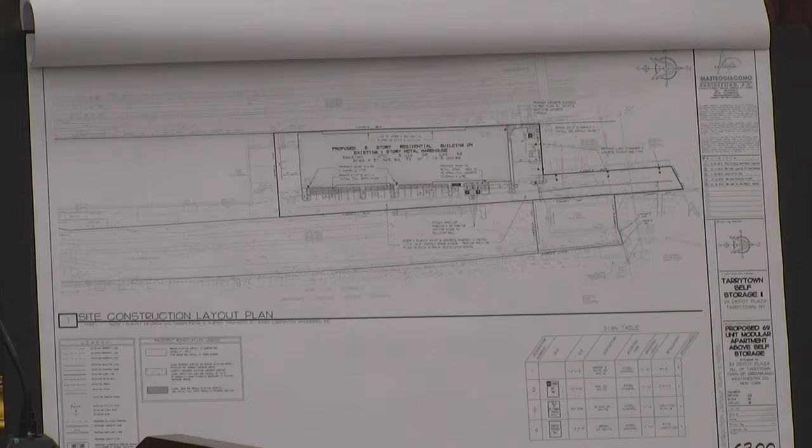So they're proposing 2 loading spaces for the storage unit, but we would like to emphasize that this is really intended to act as transit-oriented development. No, I realize that - we know that very well, because we're supporting more density because of that.

The question we've been wrestling with, not just for this site but for the station area project, is appropriate levels of density for everything in the station area, which includes this site. You're asking for a zone change different than what might apply to the station area, but I want some bearing on what's possible here. Normally we have a high ratio of 2 parking spaces per residential unit; now we're down to 1, in recognition that it's literally on the railroad track. So I want to know, if we're at 1-to-1 primarily, taking into account the storage area needs a few spaces, and the retail has to have spaces too.

I believe there were only a handful of spaces for self-storage. If they got the actual 93 spaces, accounting for part-time use, that comes out to a ratio of 1.3 spaces per unit based on the 69 units. You mentioned 1.3 in a memo to us. If you look at the whole 93 spaces, it's less if you take 20 away. In a memo you sent us, you said an additional 40 spaces would be available at night and on weekends for a total of 102 by use of shared parking. What would the shared parking be with?

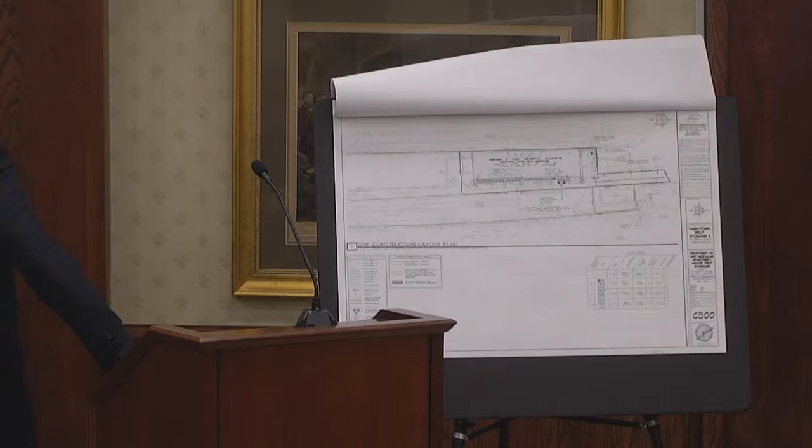Probably the restaurant. Actually, if it's 32 spaces on site — they talked about 40 spaces in the parking lot available all the time with the MTA, then 20 spaces available on weekends and at nights. That's 93 spaces, not 104, so there's an error in the memo regarding the 1.3 figure.

Good evening, Mr. Chairman. For the record, David Smith, Principal with Planning and Development Advisors, Project Planner for the team. I think the questions you're asking are all important, and one of the items we'll include as part of the expanded EAF is a supplement to the parking study prepared by JMC, which will evaluate all available parking resources within the project area and how they are configured.

Also an evaluation of shared parking, because here you've got opportunities where different uses may have different peaks throughout the course of the day. That will be part of our supplemental submission to your board. In addition, there were other matters discussed as part of the work session and in conjunction with input from your planning staff, and I'd like to quickly run through what we'll be preparing and submitting as part of that supplemental submission.

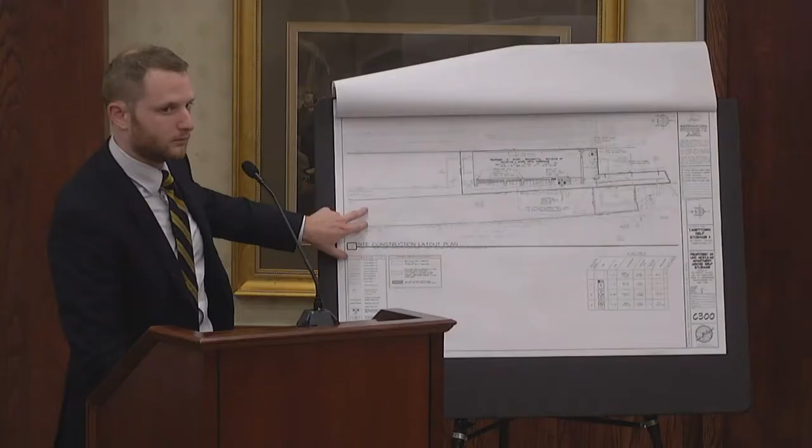So where is the area of concern with the trailer parking? Where your hand is, right here? Well, it started at the very beginning of the driveway, adjacent to lot 37, the very northern part, as you entered along the Butler Building on that side, and also, if I remember, probably in front of the housing on that side.

But it extended at different times up and down that roadbed. Plus the roadbed's condition, obviously, is now your responsibility. They'd have to put a new roadbed in there. The prior site plan approval addressed that road, that it was to be redone, provide new drainage, curbs, and so on by them. So they know that, right?

So what I'd like to add to that note, since you're on that topic, I know we discussed, Mr. Smith brought up the circulation of traffic and pedestrians. I think you need to be a little bit creative, because this is a different type of use compared to the prior use of the self-storage.

So the 32 spots that you have adjacent to the building, I would like to see a sidewalk along the building, so that the pedestrians don't have to walk out to the street, and they can walk in between the vehicles and the building safely into the building. Because there is that constant traffic circulation of trailers and vehicles going through there.

So I think you have to be a little creative. Maybe if it requires a variance from the standard 9x18 spots, that might be something we need to consider. Go to a compact, perhaps an 8x15, but we need some safety for the pedestrians getting out.

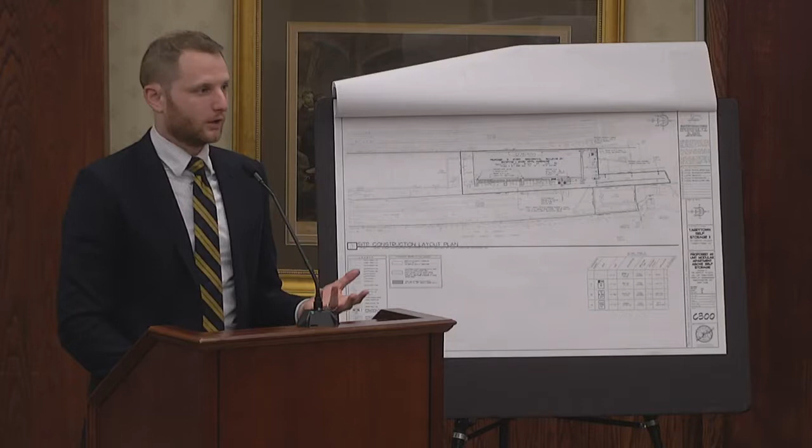So unless the board has any additional questions, we would ask that the board declare its intent to act as lead agency and set the public hearing for August, and we're going to work on getting you as much of those materials as we can.

Anybody have any questions back there? I have one question. Is this going to be modular construction, or is it going to be wood? According to the plans, they indicated type 5A, if I am correct, which is any materials approved by the code, which is wood.

On that same note, I think there has to be some consideration to the wall that's right adjacent to the railroad property. It should be of non-combustible materials, and also something with noise retardancy. With residents being right on the railroad, I think you want to avoid that. You're going to have to do probably triple pane windows and things like that. Yeah, we'll look at those issues as well.

Do you want more separation between the wall and the building, or? As long as it's code compliant.

Okay, I'm going to move that the planning board declare the proposed action an unlisted action and indicate its intent to be lead agency for the review of the zoning petition and for the site plan review, with proper notification to involved and interested agencies and to the Westchester County Planning Department for review under GML, the General Municipal Law.